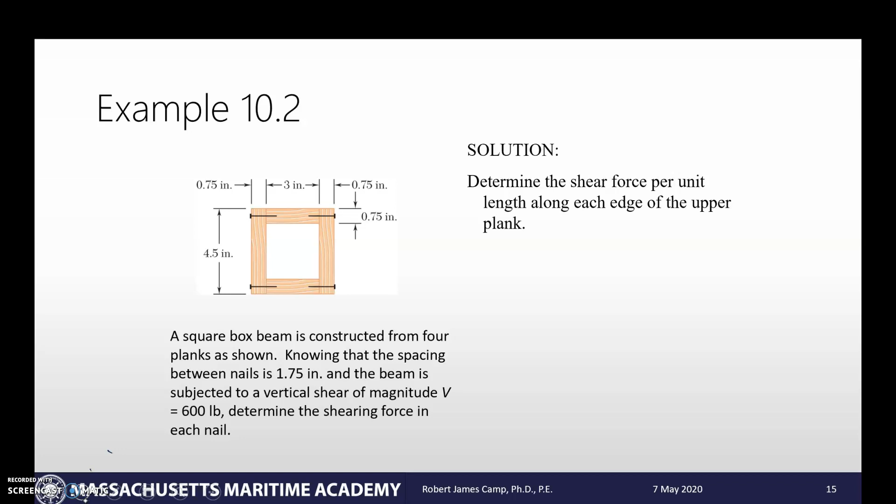So we're going to determine the shear force per unit length along each edge of the upper plank. We're only going to do the upper because the upper and lower are going to be the exact same because of symmetry. And then after that, based on the space in between the nails, we're going to find the shear force in each nail. So as we look at it, we're developing a vertical force of 600 pounds. It's positive, so we're assuming it's down. But since everything's symmetrical, even if it's going up, it's not going to matter.

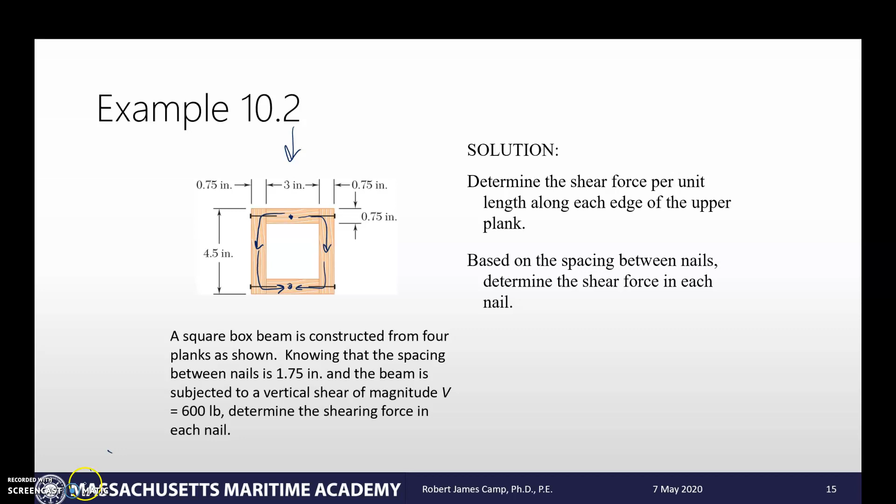So that means for my shear flow, I'm going to start here, and things are going to flow till we get back here. Why is that important? It's important for calculating out Q and knowing which area is going to be driving the force. Because if I look at it here, let's mark it in red, this is where the nail is going to be experiencing shear force. And also right here.

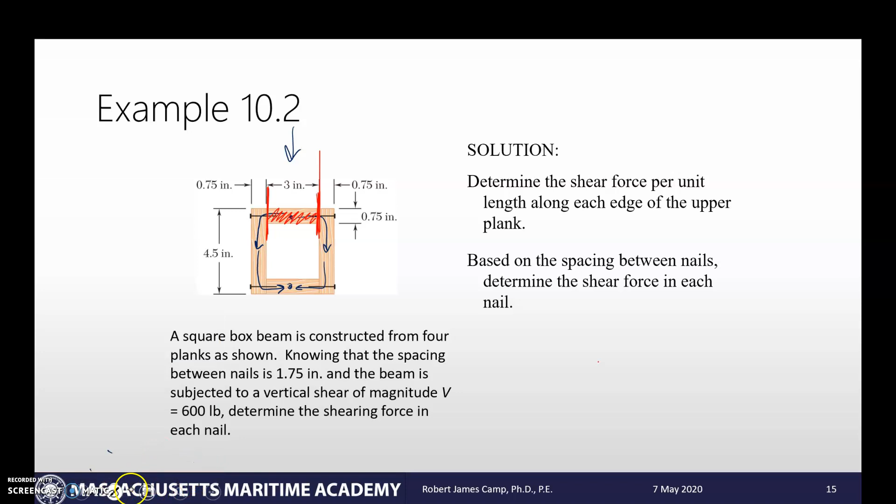So as I'm calculating out the shear flow, it's going to be based around basically this piece of wood, because that's where the shear starts to flow. That's what's going to be pushing everything. So that's what all our Q is going to be based on. So now that conceptually we've got everything there, let's actually start looking at solving the problem.

So I have my box beam sitting here, and what we need to do is determine that shear force per unit length. And for the upper plank, we're going to have to calculate out Q. So what's our Q again? Q is really what's driving that shear force itself. So Q is equal to Y prime bar times A prime.

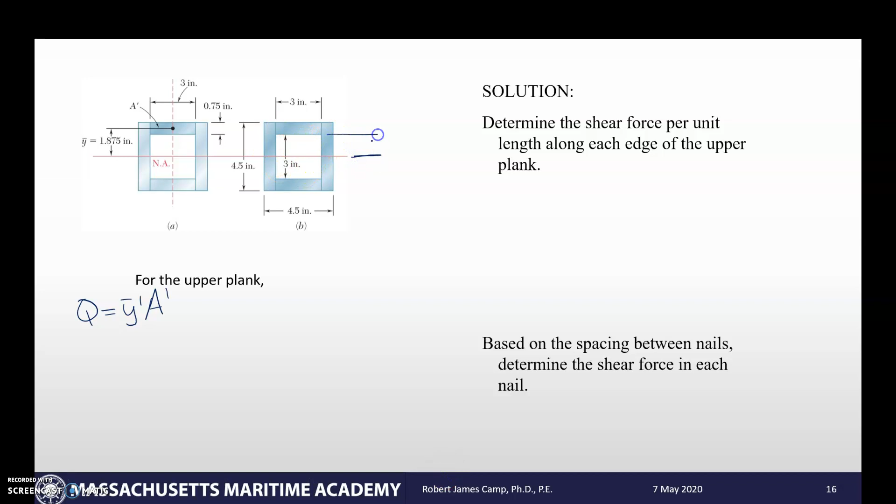So as I'm looking at it, I have this 3-inch box here. And it is a symmetrical box, so it's 3 inches across here. But since it's all symmetrical, I know that if I take this as my 0 point, from here to the bottom of my beam, it's going to be 1.5 inches. I know that because the inside of this is 3 inches.

So what's my area for Q? It's this guy right here. That is my transformed area. That's what's driving everything. So I need to know what my Y bar prime is. So I'm looking at where the centroid of that guy is. That guy's going to be in the middle of the beam. I need to know how thick the beam is.

Well, I have a 3-inch area in the middle. On the outside, it's 4.5 inches. So that leaves me 1.5 inches of space. So these boards are all 3/4 of an inch thick. So 3/4 of an inch, half of that is going to be 0.375. 0.375 plus 1.5 will give us the distance to the centroid of that section, which is going to be 1.875, which you might have noticed is already listed over here.

So that is how we find our Y bar prime, 1.875 inches. And the area is just the transformed area, so we're looking at this area here, 3 inches times 3/4 of an inch.

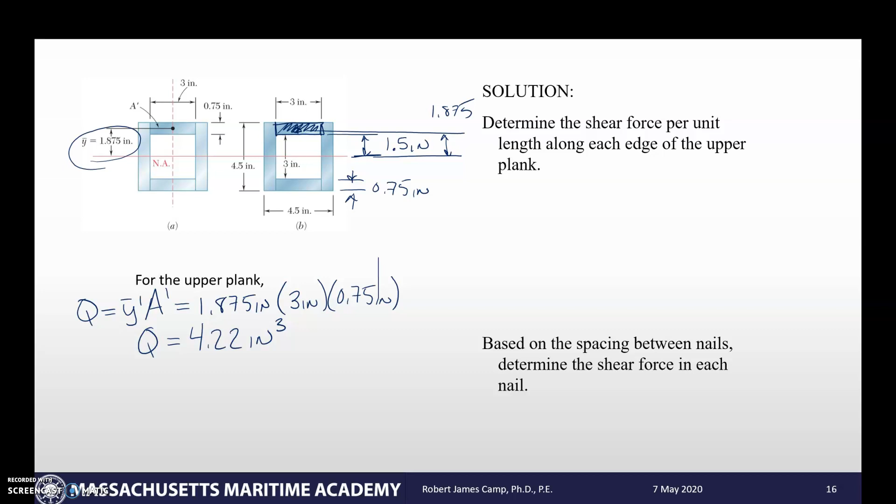Okay, so if I multiply all that together, I have a Q, and this is my transformed area, what's pushing on everything, 4.22 cubic inches. Okay, so now that I've got that, how do I calculate out my shear flow? Well, my shear flow, q, is going to be V big Q divided by I. Okay, and that's going to give us the force per unit length.

Well, I am going to need now, what is my I? So the overall beam cross-section, it's a rectangle, so I know that I is going to be base height cubed over 12. Now, this is a hollow box. What am I going to do? I have to use superposition. To get the hollow box, I'm going to take the rectangle, subtract the rectangle out of the middle.

So the overall rectangle is 4.5 inches on side, so it's going to be 4.5 inches times 4.5 inches cubed, or just 4.5 inches to the fourth divided by 12. I'm going to subtract from that the inside, which is 3 inches on side. So it'll be 3 times 3 inches cubed divided by 12, or just 3 inches to the fourth divided by 12. And then if I multiply that together, I get I of 27.42 inches to the fourth.

Now I have my information. I can plug it in and find out what my shear flow is. So my shear flow: V is 600 pounds, Q, 4.22 cubic inches, divided by I, 27.42 inches to the fourth. So that will give me a total shear flow of 92.3 pounds per inch.

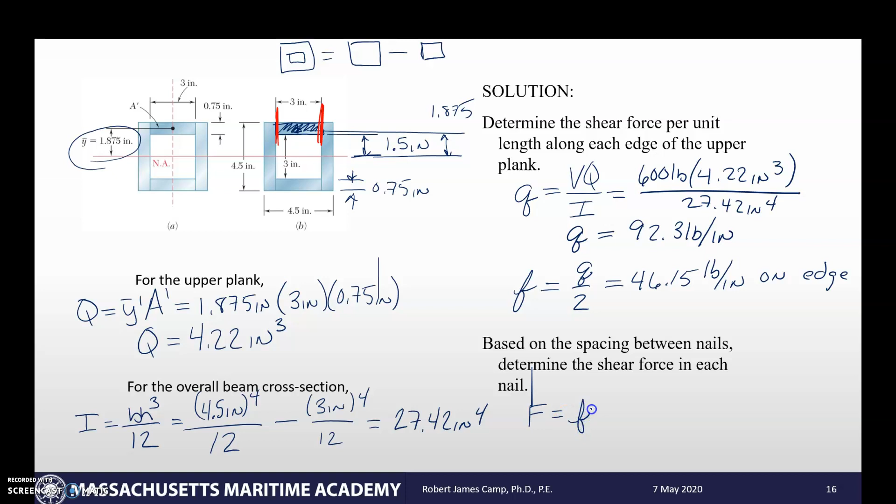Okay, so now I want to find the force. What we have here is a force per length. Well, now I know what my length is. It's 1.75 inches. That's the distance between my nails. So to find the full force, I'm going to take my force per unit length and multiply it by the length that I have. So 46.15 pounds per inch multiplied by that 1.75 inches, because that's how our nails are spaced. And so that'll give us a force in each nail of 80.8 pounds.

And so now that we have this force, say the nail is 1/8 of an inch in diameter, you know what material the nail's made of, you can calculate out the stress in the nail based on the force being applied from the box load. And who knows, maybe the nails are fine. Maybe you can move them farther apart, use less nails and save money. What would the force be if I had these guys at 2 inches apart?

You just go back and take that 46.15 and multiply by 2. And you end up getting 92.3 pounds of force. Well, what if the nails are 4 inches apart? You just take that 46.15, multiply it by 4, and all of a sudden you've got 184.6 pounds of force in each nail. So once you get the base equation set up, you can start playing with spacing of your fasteners to minimize the amount of fasteners you want to use.